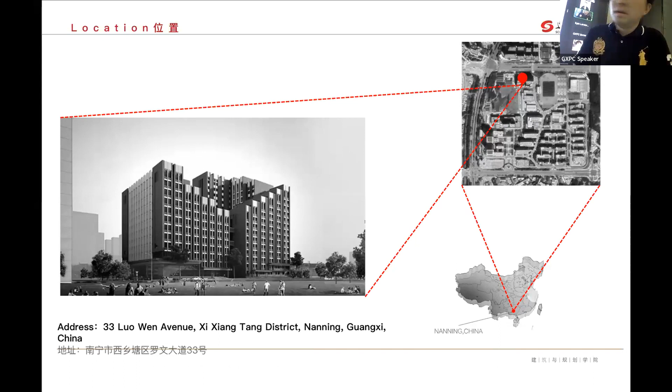So right now, let me introduce our college. This is Guangxi Polytechnic of Construction. Part one is the college introduction. This is our address, in Luo Wen Avenue, Xixiangtang district, Nanning, Guangxi. This is our campus, and everyone can see it.

Picture one is a training building. Number two is a teaching building. Number three is the auditorium. Number four is the gymnasium.

This is our college introduction. We have four major programs: architecture design, landscape design, landscape engineering, and urban planning. This is our teacher team, which is a very high-quality teacher team. This is the professional certification. Number four is our professional future.

We also have the 3D model experience and application center, the BIM technology application center, and the Vision Simulate Teaching Research and Development Center and Project Design Achievement Training Room.

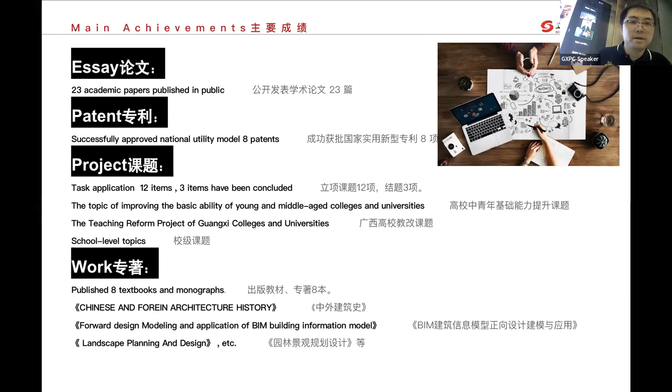Part three is honors and achievement. Everyone can see we have essays, patents, projects and works. This is our main achievement.

Thank you. Thank you, everyone.

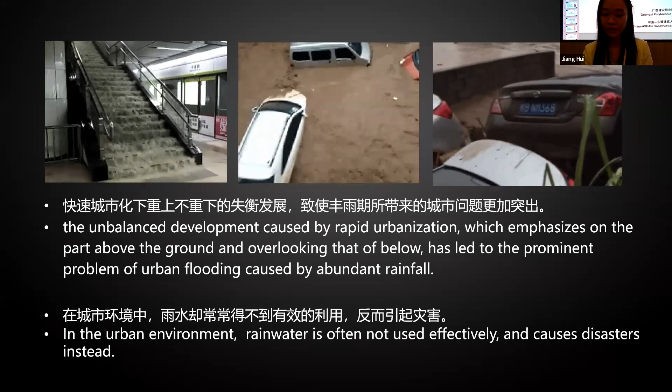However, the unbalanced development caused by rapid urbanization, which emphasizes the part above the ground and overlooks that below, has led to the prominent problem of urban flooding caused by abundant rainfall. Whenever there is heavy or continuous precipitation, the amount of rainfall often exceeds the city's drainage capacity, resulting in waterlogging hazards within the city. In many urban environments today, rainwater is often not used efficiently and causes disasters instead.

In recent years, waterlogging after raining has regularly evolved into a chronic disease in many large and medium cities. In view of the shortage of water resources, runoff pollution and urban floods caused by rainwater, the technology of rainwater collection, treatment, and comprehensive utilization has become an urgent problem to be solved.

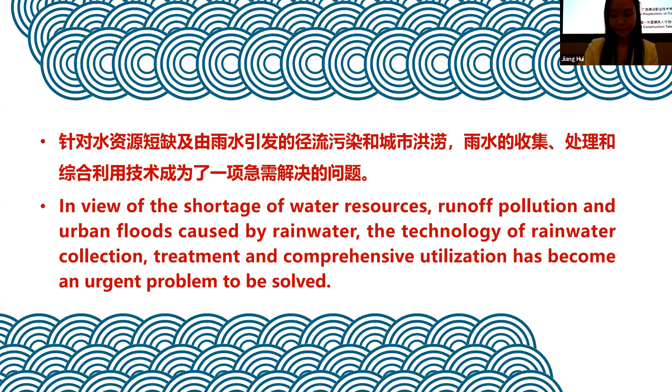Before we analyze rain gardens, let's talk about the following related concepts. The first concept is the sustainable landscape concept.

In contemporary landscape design concepts, there is a growing awareness of building a connection between humans and nature. Sustainable landscapes are places that strike a balance between natural reality and modern technology, promoting and emphasizing place restoration, environmental responsibility, and social development. There is a wide range of sustainable landscape concepts, such as the three 'low' concepts of low input, low impact development, and low maintenance, and the concept of smart city construction.

The second concept is low impact development, which refers to the use of source, decentralized measures to maintain the pre-development hydrological characteristics of the site during development.

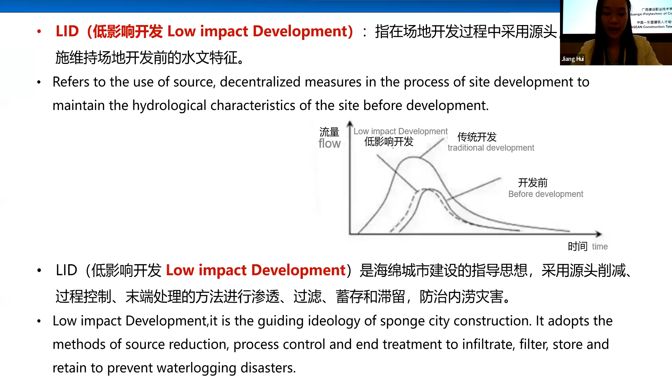The third concept is the sponge city. Sponge city is a new generation of urban stormwater management concept. It means that cities can be like sponges, having good elasticity in terms of adapting to environmental changes and responding to natural disasters caused by rainwater, which can also be called water elastic cities.

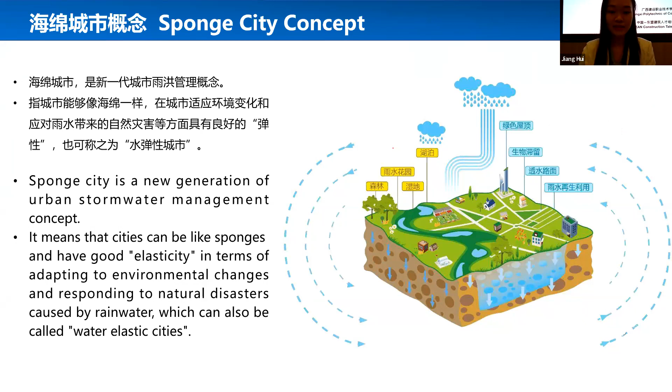The international terminology is low impact development stormwater system construction. When it rains, water is absorbed, stored, infiltrated, and purified, and when needed, the stormwater is released and used.

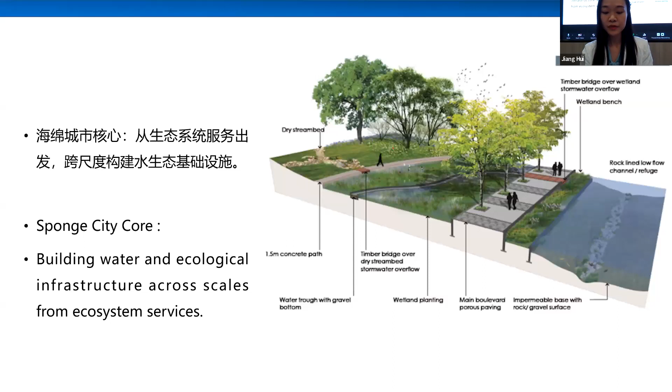The core of sponge city is the construction of water ecological infrastructure, from ecosystem service through cross-scale construction and the combination of multiple types of sponge technologies.

To build a sponge city, we must first reverse the concept. The traditional urban construction model has hardened roads everywhere. Whenever there is heavy rain, the drainage mainly relies on gray facilities, such as pipes and pumping stations.

The main planning and design concepts are rapid removal and centralized control, which often resulted in sudden changes between drought and floods.

Building a sponge city is not about replacing the traditional drainage system with a new one. Rather, it relies on the traditional drainage system and maximizes the role of the city itself.

In the process of sponge city construction, natural precipitation, surface water, and groundwater would be systematically integrated. It would coordinate all aspects of water recycling, such as water supply and drainage, and consider its complexity and long-term nature.

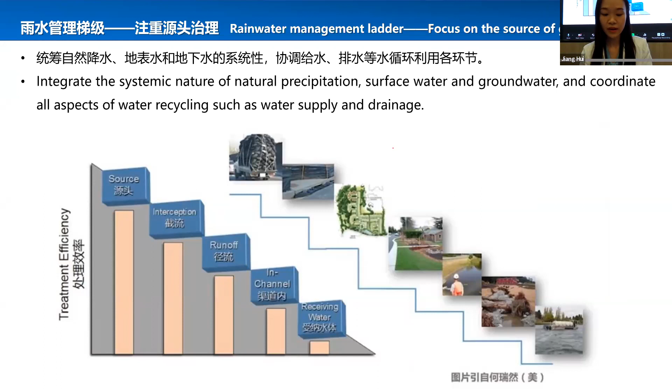The main planning and design concepts are slow drainage and slow release, and source decentralized control, which not only avoid flooding but also efficiently collect water.

Subsequently, this concept quickly attracted more and more people's attention with the development of home garden landscaping. Unlike other environmental factors that challenge us, rain gardens change the way we live, such as lowering our daily cost of living and making us more aware of how we can benefit the environment.

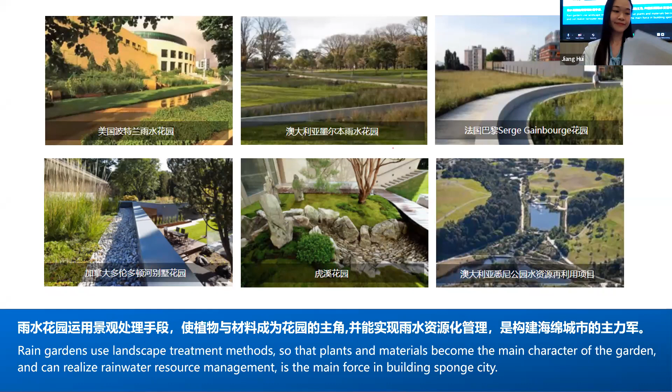Okay, next I'll talk about what a rain garden is.

Rain garden is an important technical measure in the low-impact development system. The principle uses rainwater that is filtered and purified through the interception of plants and infiltration of soil, in order to achieve the effect of reducing the volume of rainwater runoff.

Narrowly defined, rain gardens are only limited in scale and simple structure of shallow concave green space, suitable for neighborhood or private house greening.

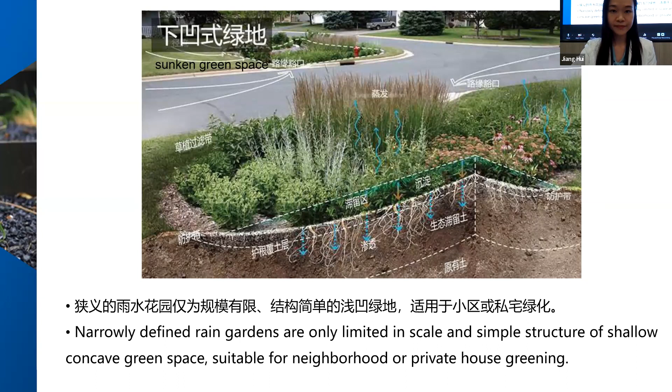It uses biological purification means to stem the runoff while regulating the storm, providing a large amount of irrigation water to the park where it is located.

It provides treated irrigation rainwater to surrounding vegetation such as trees and sports areas, solving the crisis of local drinking and irrigation water. There are various water features and corresponding facilities in the garden.

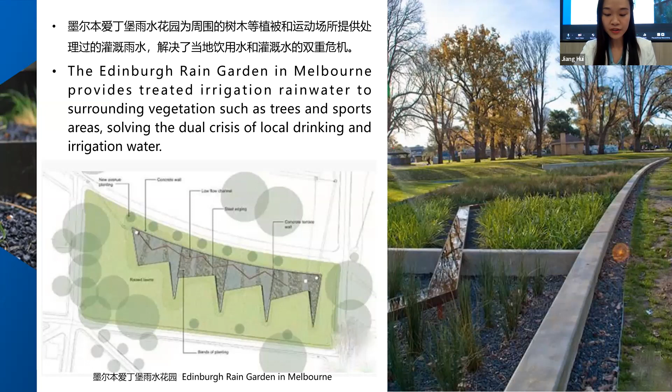These facilities all help to store rainwater, purify water, and divert rainwater to desired areas through diversion pipes. The water, through the roots of various vegetation, is naturally purified.

The concept of rain garden is very broad and encompasses all landscaping that maximizes the capture, conveyance, and conversion of natural precipitation. The entire garden becomes a rain garden. Each element is a component of a rain garden, and a large garden contains smaller rain gardens.

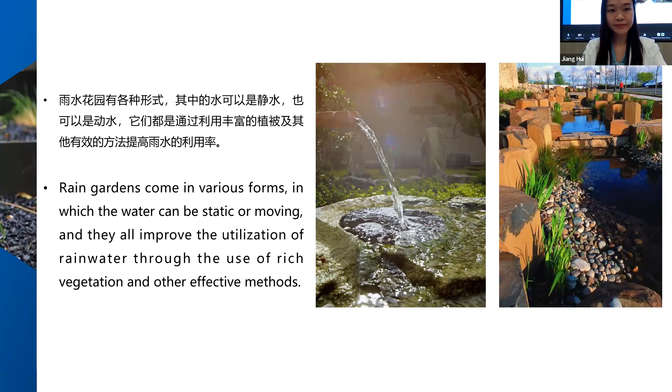Rain gardens have many forms of water features, either still water or moving water. Sponge cities and rain gardens represent a top-down theory promotion and bottom-up design practice.

The second part: let's talk about the classification and functions of rain gardens. I will explain this through 5 parts, including the types of rain garden, construction of rain gardens, how rain gardens work, the function of rain gardens, and the difference between rain gardens and ordinary gardens.

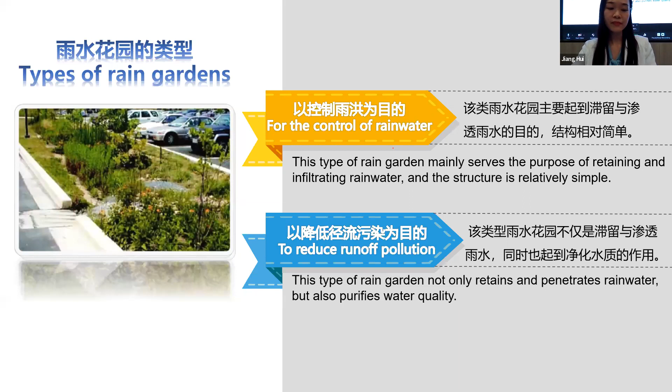The other is a rain garden for the purpose of reducing runoff pollution. This type not only retains and infiltrates water, but also purifies it. It is suitable for geographical areas with relatively serious environmental pollution, such as urban centers and parking lots. The removal of pollutants from stormwater requires careful design of soil proportion, plant selection, and substrate structure.

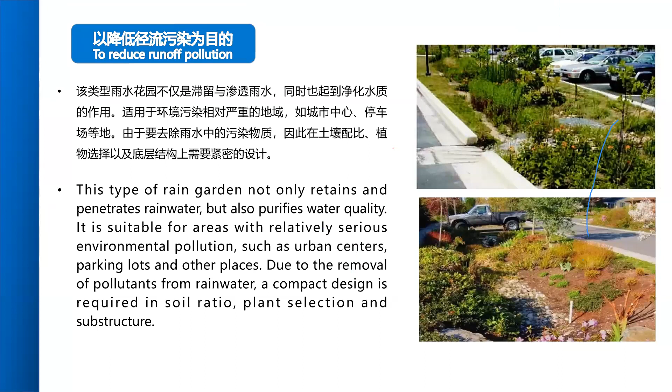Next, let's take a look at the structure of the rain garden. This is the structure. A rain garden is generally constructed from the inside out as a gravel layer, a sand layer, a planting soil layer, a mulch layer, and a water storage layer.

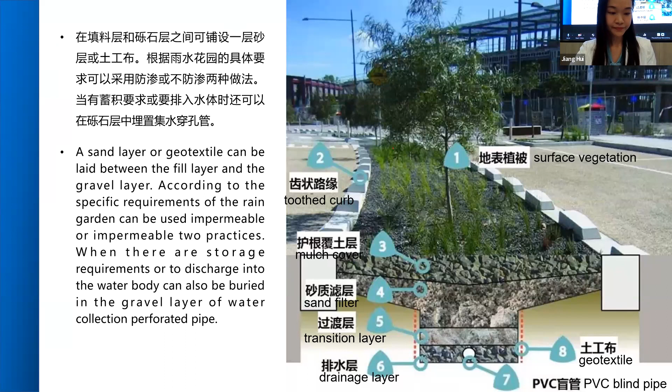At the same time, there are perforated pipes to collect rainwater and overflow pipes to exclude water that exceeds the design capacity. Depending on the specific requirements of the rain garden, both impermeable or non-impermeable practices can be used. So, how does a rain garden work?

In practice, rain gardens take the following forms, including grass swales, sunken green space, and tree pools. Many rain gardens have surface runoff, but they don't function just like a water feature. This is because there is no precipitation in the area for a long time, so the ornamental nature cannot be guaranteed when there is no water flow. Therefore, the design takes into account the landscape in times of drought.

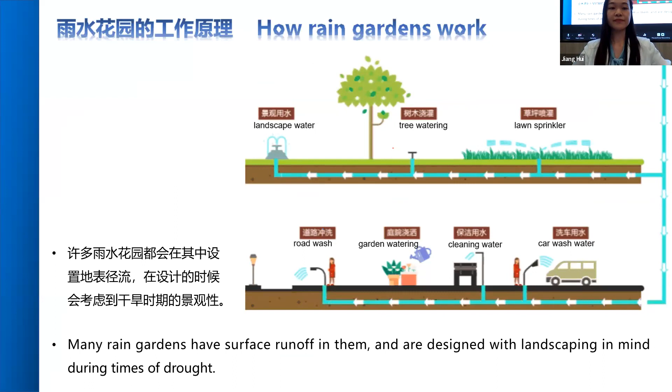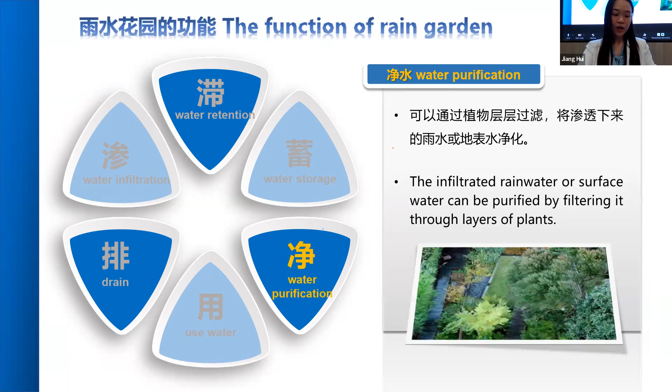Next, let's look at the functions of rain gardens. Rain gardens have the following 6 main functions: water infiltration, water retention, water storage, water purification, water use, and drainage.

Next, I'll talk about the differences between a regular garden and a rain garden. In terms of purpose of construction, a regular garden refers to a place where flowers and trees are planted for play and rest. Rain gardens are naturally occurring or artificially excavated shallow depressions of green space, used to collect and absorb rainwater from roofs or the ground, serving as ecologically sustainable rainwater control and stormwater utilization facilities.

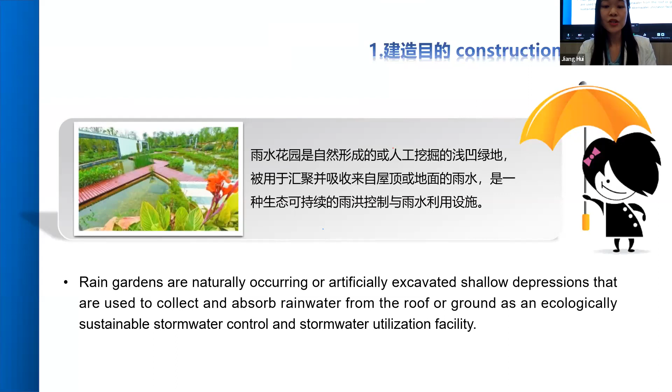In terms of structure, there are also differences between regular gardens and rain gardens. Regular gardens generally have only a planting soil layer and a vegetation layer. In contrast, the construction of a rain garden is more complex, containing 6 structures such as a gravel layer, sand layer, artificial fill layer, planting layer, planting soil layer, and cover layer.

The plant selection for the two is also different. Regular gardens mainly use ornamental plants based on the local climate and the preferences and wishes of the homeowner. Plants for rain gardens need to be selected for their well-developed root systems, strong growth, and resilience.

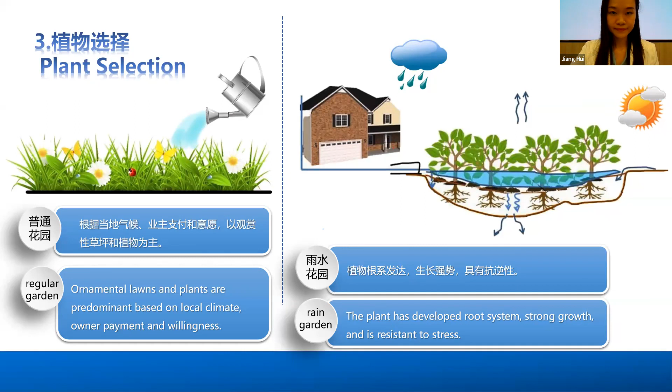Okay, let's begin the third part: rain garden design and construction points. To carry out the design of a rain garden, we mainly need to follow 4 design principles, including the principle of low impact, function first, landscape beauty, and safety. The most important one, I think, is the safety principle.

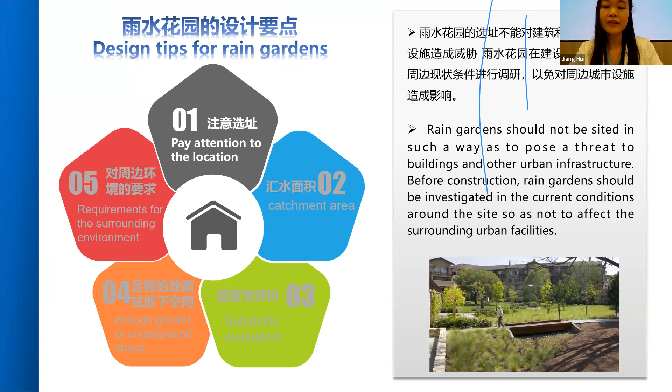Regarding the design points of rain gardens, there are 5 main points to know. The first point is to pay attention to site selection. Before construction, the current conditions around the site should be investigated so as not to affect surrounding urban facilities. For example, in many residential rainwater harvesting systems, the setting of a rain garden requires a minimum distance of 3 meters from the building to avoid soaking the foundation.

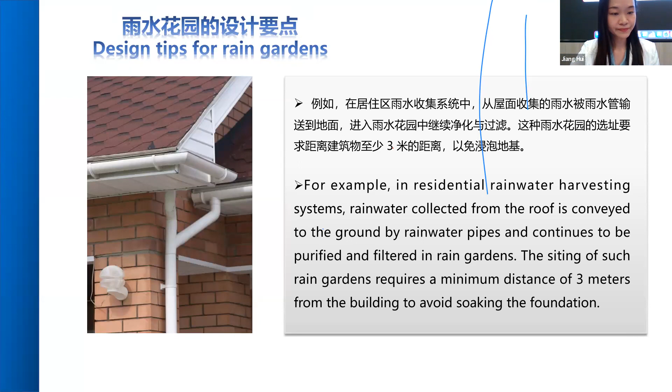The second point requires attention to the catchment area. The site should have a certain catchment area which can collect a sufficient amount of rainwater. For example, urban spaces such as urban roads, urban squares, and low-lying lands can play a role in rainwater control and utilization.

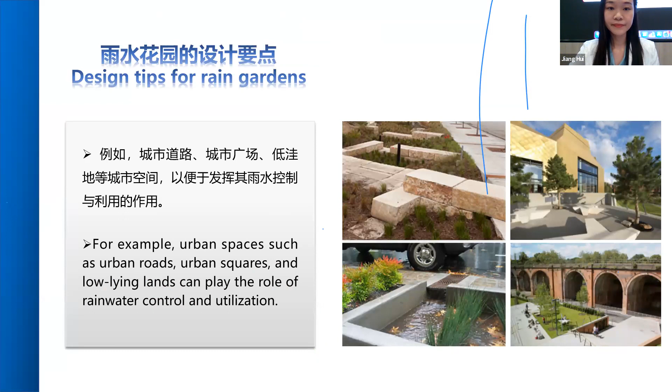The third point is that the design of rain gardens also needs corresponding suitability evaluation. The site must be assessed for suitability before planning. The permeability of soil on the site should be evaluated when setting a site for a rain garden. If the permeability of soil is poor, prolonged waterlogging can occur, which is detrimental to plant growth and at the same time tends to breed mosquitoes and pests, negatively affecting the urban environment.

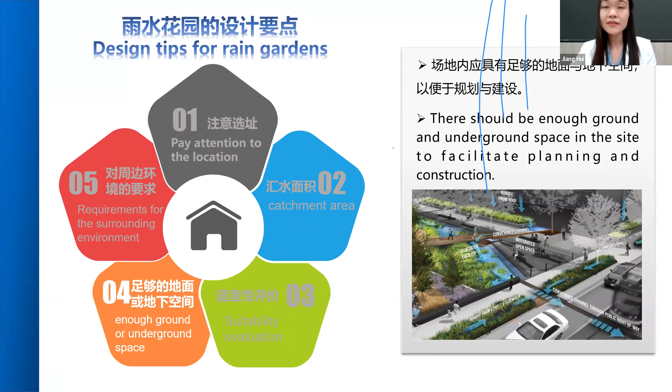The fourth point is that there needs to be enough ground or underground space. The size of the rain garden will be designed based on a water balance analysis within the site. And the fifth point is that the use and maintenance of rain gardens also have certain requirements on the surrounding environment.

As we mentioned earlier, the plant selection for a rain garden is different from that of a regular garden, so special expertise in plant selection for rain gardens needs to be taken into account. Specifically, plant selection for rain gardens requires attention to the following four key points.

First, give preference to native plants. Native plants are well adapted to local climate conditions, soil conditions, and the surrounding environment, and can exhibit good adaptation ability, giving the garden landscape a strong local character.

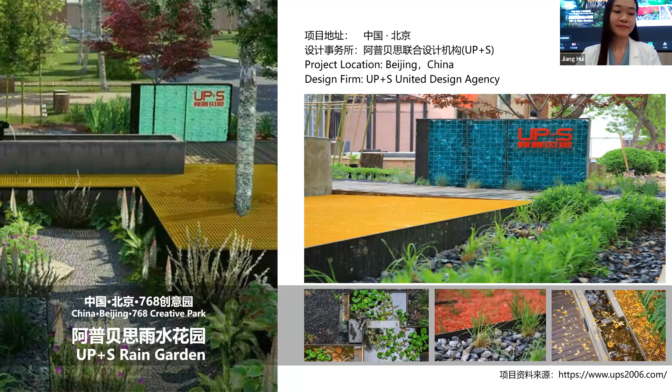The project introduced today is located in the 768 Creative Park. The park was formerly known as Dahua Electronic Industry Factory. It was built in the 1950s, designed by original Soviet designers, and is one of the few surviving old industrial sites. In 2009, it was transformed into a gathering place for cultural and creative enterprises, focusing on knowledge innovation, scientific research and development, and design creativity.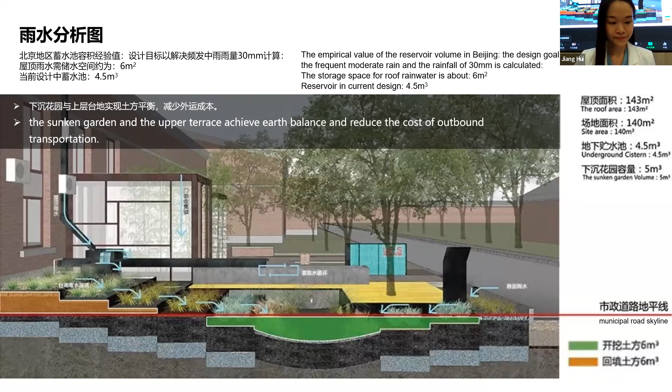The construction of the rain garden was also accomplished through constant interactions between the designer and the builder, as well as several revisions.

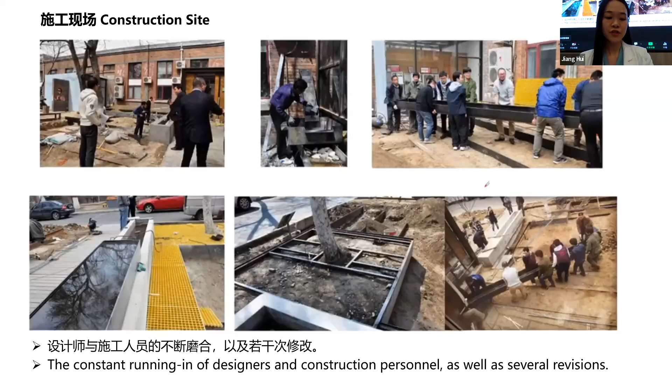The rain garden manages the rainwater on the roof of the building, and the surrounding sites become a true rainwater bank.

This rain garden has 5 distinctive features: rainwater path, terrains, low maintenance plants, engineering efficient materials, and bright colors.

The design focuses on the landscape treatment of the stormwater facilities. For example, the low impact material fair-faced concrete presents a natural and friendly texture.

The use function of the space is also a key consideration. The viewing platform facilities allow close access to and observation of the rain garden, and recycled water features allow rainwater facilities to be approachable and interactive.

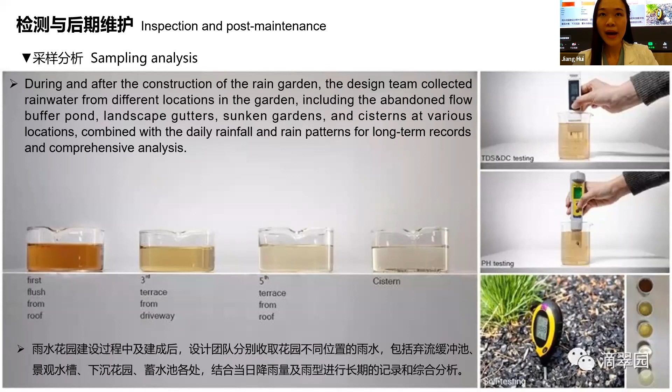Although low maintenance, gardens still require regular maintenance of plants and the rainwater system to ensure that rainwater gardens perform their role of purifying and collecting rainwater.

This is the end of the first. Okay, let's begin the second.

The next project I will introduce to you is Shanghai Houtan Park. The project is located in Expo 2010 Park in Pudong, Shanghai, China. This project was awarded 2010's American Society of Landscape Architects Design Excellence Award.

The design company for this project is Turenscape, a Beijing Turen planning and design company. Turenscape was founded by Dr. and Professor Kongjian Yu in 1998, and the company is certified as a first level design institute by the Chinese government.

The project was built on the brownfield of a former industrial site. Houtan Park is a regenerative living system on Shanghai's Huangpu riverfront. The park's constructed wetlands, ecological flood control, and reclaimed industrial structures and materials, along with urban agriculture, integrate components of an overall restorative design strategy to treat polluted river water and recover the degraded waterfronts in an aesthetically pleasing way.

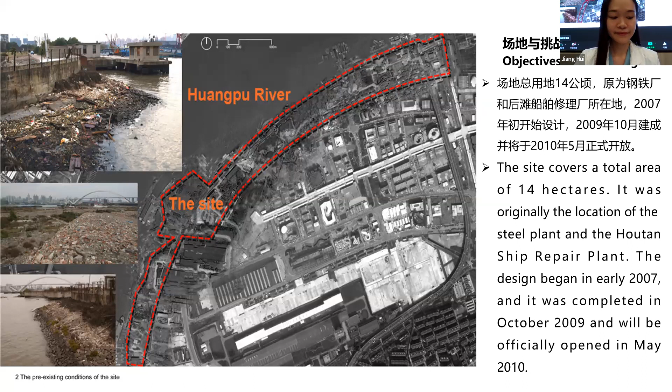The site presents many challenges to the design. Let's see the first challenge: severe soil and water pollution.

The site was originally an industrial brownfield with industrial soil waste and construction waste everywhere, deeply buried. Soil pollutants were serious too. In particular, the water of the Huangpu River was seriously polluted, inferior to Class 5 water. The original abandoned land of the site was invaded by alien species, creating a barren scene.

How to transform the habitats and create a safe and healthy public space is the first challenge facing the design.

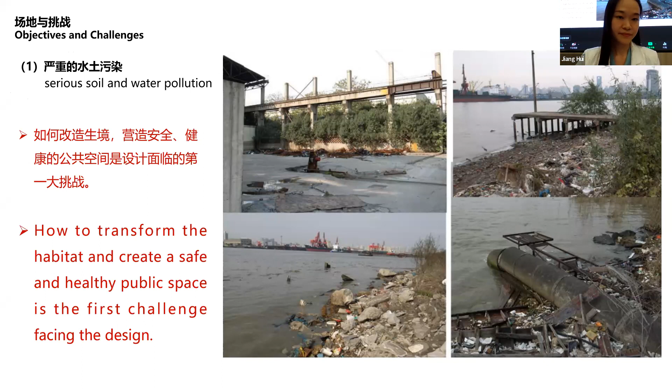The second challenge was to improve flood control. The existing concrete flood wall was designed to protect against a 1,000-year flood event with a top elevation of 6.7 meters, but it is rigid and lifeless. The 2.1 meters daily tidal fluctuation creates a muddy and littered shoreline, currently inaccessible to the public. A conventional retaining wall would continue to limit accessibility and preclude habitat creation along the water's edge, so an alternative flood control design was necessary.

How to meet the flood control requirements and design a waterfront and ecological riverside public space is the second biggest challenge facing the design.

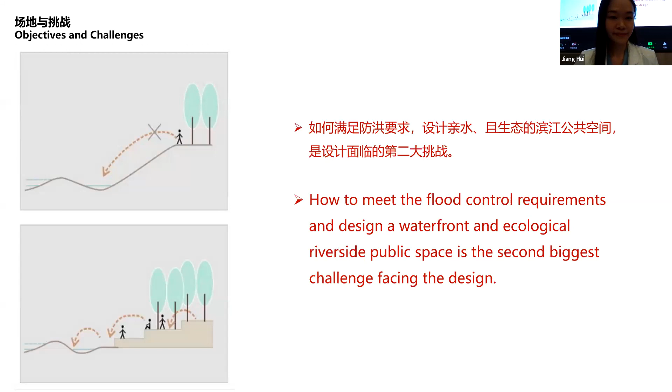The third challenge was the site itself. The area is long and narrow, located between the Huangpu River and the urban expressway, with water frontage over 1.7 kilometers in length but averaging only 30 to 80 meters in width.

Here, let's look at our design strategy. Regenerative design strategies were used to transform the site into a living system that offers comprehensive ecological services, including food production, flood and water treatment, and habitat creation, combined in an educational and aesthetic form. The site is destined to be an innovative demonstration of the ecological culture of the 2010 Expo.

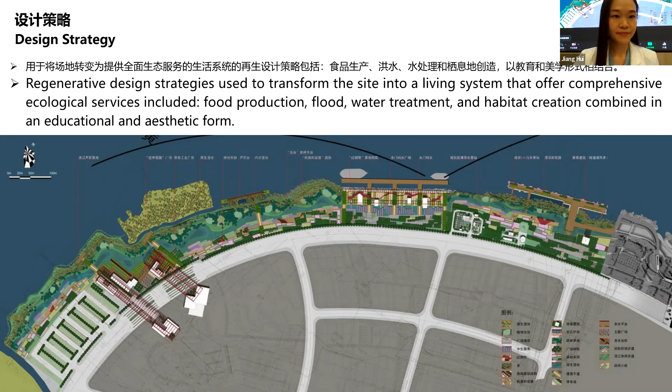Through the center of the park, a layered constructed wetland was designed to treat contaminated water from the Huangpu River. Cascades and terraces were used to oxygenate the nutrient-rich water, remove and retain nutrients, and reduce suspended sediments while creating pleasant water features. Different species of wetland plants were selected to absorb different pollutants from the water.

Field testing indicates that 2,400 cubic meters per day of water can be treated, improving from lower grade 5 to grade 3. The treated water can be used safely throughout the Expo park for non-potable uses and save $500,000 US compared to conventional water treatment.

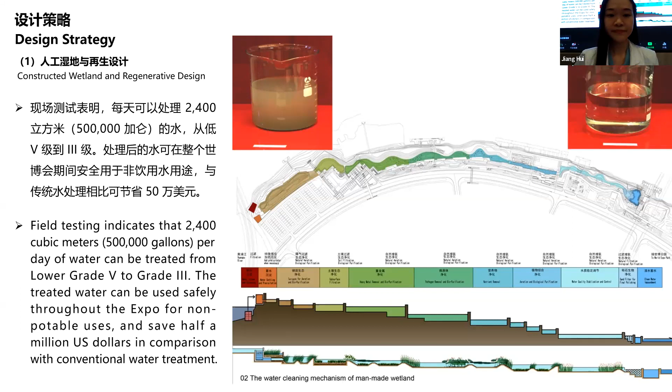And the wetland also acts as a flood protection buffer between the 20 and 1,000 year flood control levee, providing opportunities for recreation, education, and research.

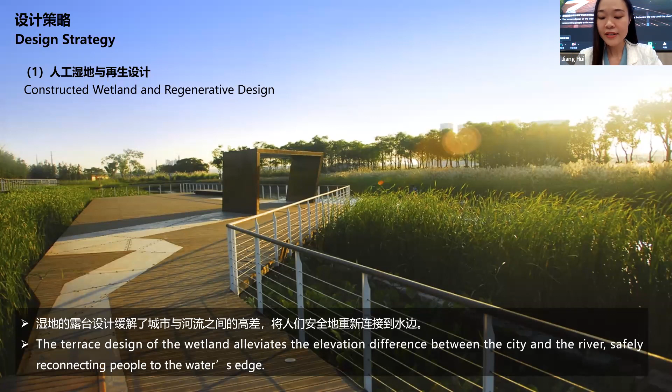The wetlands alleviate the elevation difference between the city and the river. This is the terrace design of the wetland, which elevates and manages the elevation differences between the city and the river safely, reconnecting people to the water's edge.

Additionally, the existing concrete flood wall was replaced by a more habitat-friendly riprap that allows native species to grow along the riverbank while protecting the shorelines from erosion.

And the second design strategy is memory and prophecy. It's memory and prophecy.

Inspired by the fields of Chinese agricultural landscape, terraces were created to break down the 3 to 5 meter elevation change from the water's edge to the road, and to slow the runoff directed to streams in the constructed wetland.

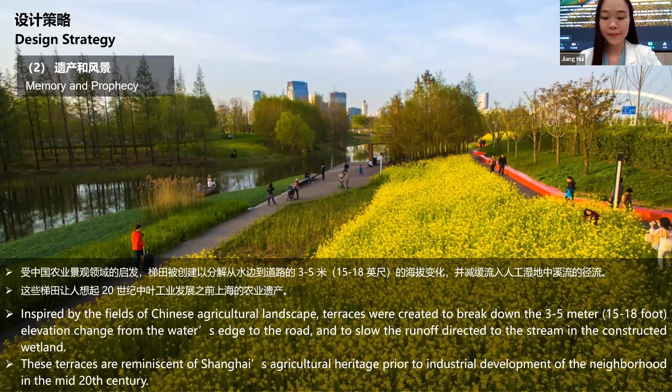Crops and wetland plants were selected to create an urban farm, allowing people to witness seasonal changes. It provides a premier educational opportunity for people to learn about agriculture and farming within the city.

The terraces enrich the landscape along the wetland by creating spaces that encourage visitors to enter the living systems through the field corridors and experience the agricultural landscape and wetlands firsthand.

The industrial spirit of the site is celebrated through the reclamation of industrial structures and materials. Shanghai is the birthplace of China's modern industry, and iconic structures that remain on-site have been transformed into hanging gardens and overlook platforms.

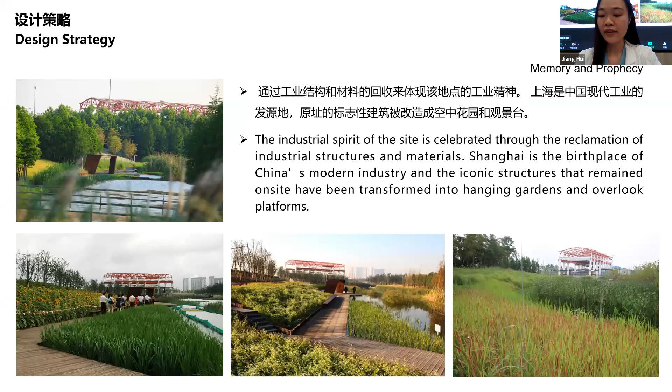An ecologically recovered landscape, urban agriculture, and industrial spirit are the three major layers of the park, woven together through a network of paths where visitors are educated about green infrastructure within a large restored recreational area.

An ecologically recovered landscape: a narrow and long valley space runs through the park, which solves the problem of flood control, opening and closing with lengths of nearly 2 kilometers, during which a series of hydrophilic trails, bridges, platforms, and a network of paths pass through the designed vegetation.

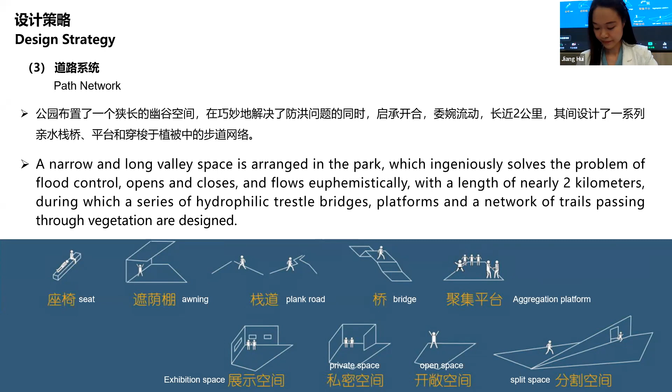The pedestrian network is composed of a main loop, a series of perpendicular roads that bisect the wetlands, and a multitude of footpaths leading through the terraces. This network ensures seamless connections between the park and its surroundings, encouraging access within the site.

Numerous platforms and enclosed containers are designed as nodes on the pedestrian network, including the hanging garden transformed from the factory structure and the landscape dock.

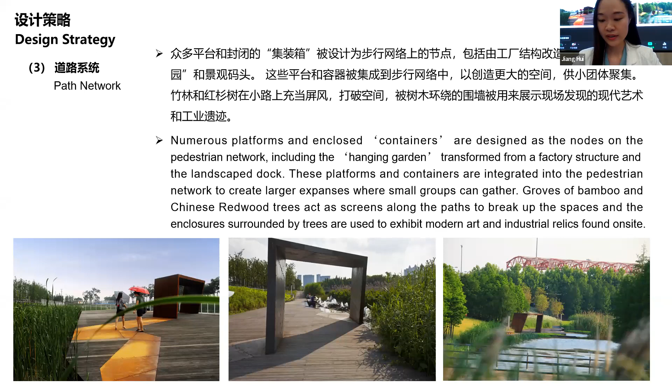Houtan Park demonstrates a living system where ecological infrastructure can provide multiple services for society and nature, with new ecological water treatment and flood control methods. The post-industrial design demonstrates a unique productive landscape evoking the environments of the past, and the future of ecological civilization, playing home to a new aesthetic base of low maintenance, high performance landscapes.

Okay, finally, let's have a video to enjoy the scenery together after the project is completed. Due to network reasons, the video playback may be a little laggy. Please bear with me. Okay, let's see.

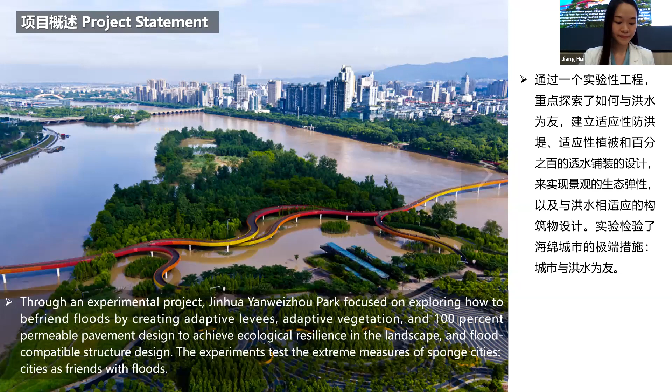Yanweizhou Park is located to the west of Dongxi Street, Jinhua City, where the Yiwu River and Wuyi River meet, in the subtropical region of eastern China. Jinhua suffers from a strong marine monsoon climate with distinct dry and rainy seasons, and the rainy season is often disturbed by floods.

A large number of floodplains have been encircled and developed. The narrowing of the river surface also makes the destructive power of the flood more powerful.

The site conditions posed 4 major challenges to the landscape architects. First, how can the remaining patch of riparian habitats be preserved while providing amenities to residents in the dense urban center? Second, what approach to flood control should be used? Third, how can it be integrated into the surrounding environment to create a cohesive landscape and provide a unique experience for visitors? Finally, most importantly, how can separate city districts be connected to the natural riparian landscape to strengthen community and cultural identity in the city of Jinhua?

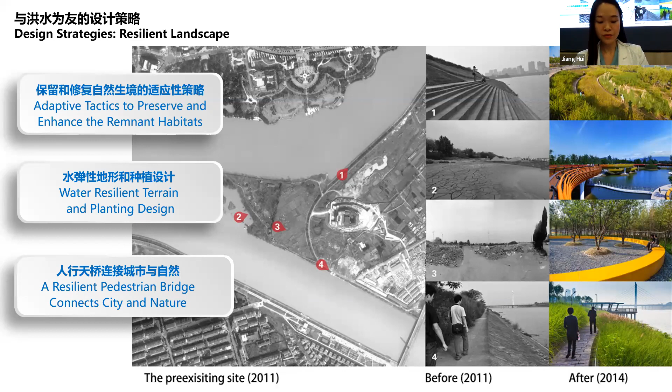The design strategy for this project is to befriend the flood, with 3 main strategies proposed. The first, an adaptive strategy, was to make full use of the existing riparian sand quarries with minimal intervention. This is why the existing microterrain and natural vegetation are preserved, allowing diverse habitats to evolve through time. The biodiversity of the area was enhanced through the addition of native wetland species.

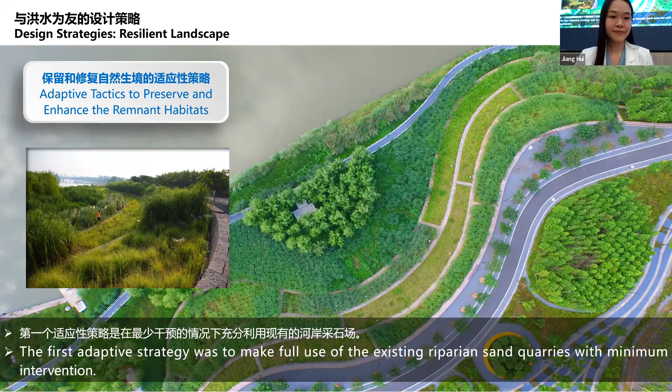The second strategy is water resilience terrain planting design. Due to the monsoon climate, Jinhua suffers from annual flooding. For a long time, the strategy to control flood was to build stronger and taller concrete flood walls along the riverbank. This severed the intimate relationship between the city, the vegetation, and the water, while ultimately exacerbating the destructive force of the annual flood.

The local water conservation department had built 2 flood control dikes, with 20-year occurrence and 50-year occurrence standards, in some sections of Yanweizhou respectively.

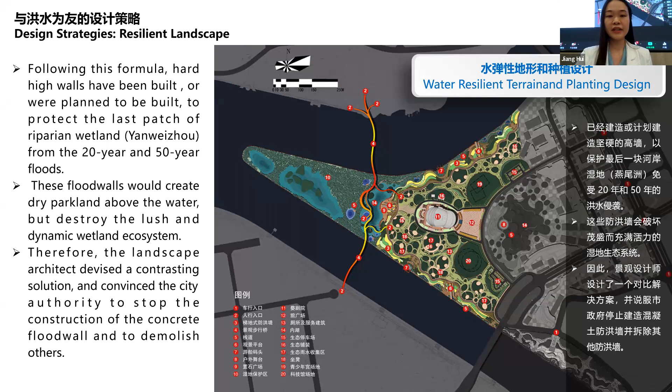This flood wall would create dry parkland above the water, but destroy the lush and dynamic wetland ecosystem. Therefore, the landscape architects devised a contrasting solution and convinced the city authority to stop construction of the concrete flood wall and demolish others.

Instead, the Yanweizhou project makes friends with flooding by using a cut-and-fill strategy to balance earthwork and create water-resilient terraces along the river embankments, covered with flood-adapted native vegetation.

This measure not only increased the flood section of the river, but also slowed down the speed of the water flow. It also relieved the pressure of flood control on the city side of the opposite bank, and improved the hydrophilicity of the park's adjacent water interface.

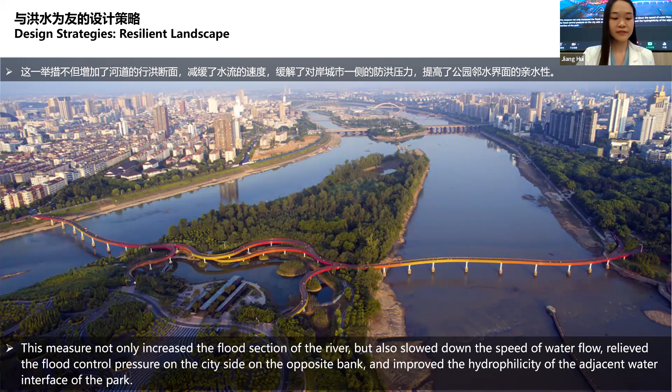The flood-deposited fertile silts on the terraces enrich growing conditions for tall grasses native to the riparian habitats. Therefore, no irrigation or fertilization is required at any time of the year. The terrace embankments will also treat and filtrate stormwater from the pavement above.

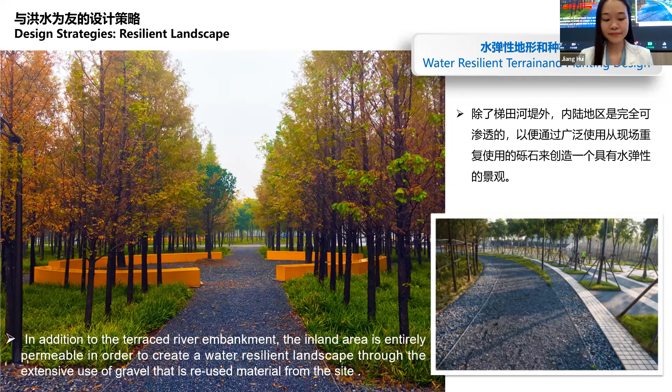In addition to the terrace river embankments, the inland area is entirely permeable in order to create a water-resilient landscape through the extensive use of gravel, that is reused material from the site. The gravel is used for a pedestrian area, and the circular bioswales are integrated with tree planters. Permeable concrete pavement is used for vehicular access routes and parking lots.

The third strategy is resilience pedestrian bridge connecting city and nature. A pedestrian bridge spans across the two rivers, linking the parks along the riverbank in both the southern and northern city districts, connecting the city with the newly constructed Yanweizhou Park within the river.

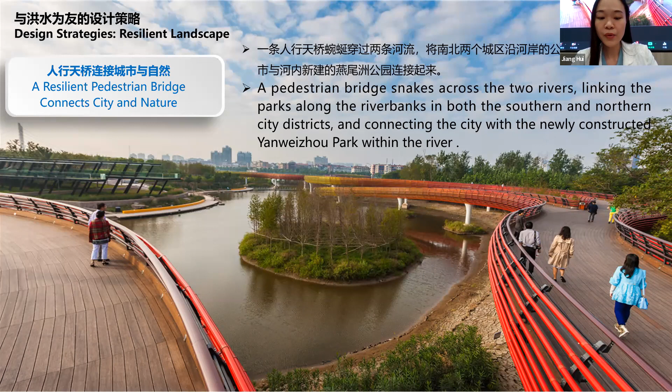Look, this is the bridge. The bridge design was inspired by the local tradition of dragon dancing during the spring festival. Like the bench dragon in the annual celebration, the bench dragon bridge symbolizes not only a form of celebration practice in Jinhua area, but it is a bond that stresses the culture and social identity unique to these areas.

As water resilient infrastructure, the new bridge is elevated above the 200-year flood level, while the ramps connecting the riparian wetland park can be submerged during the 20-year and larger floods. Flood water covers the park for a very short period of time. The bridge also hovers above the preserved patch of the riparian wetlands and allows visitors intimate connection to the nature within the city.

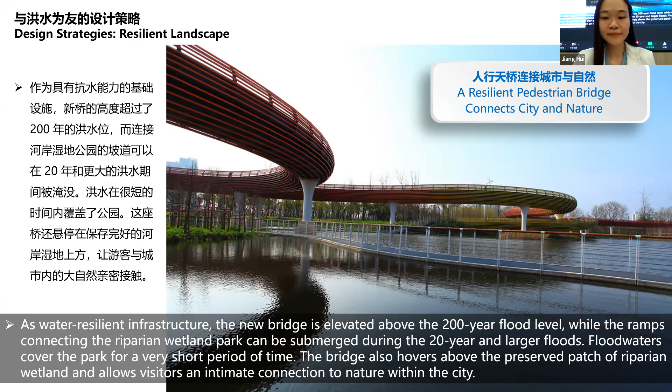The landscape architect designed the bridge to reinforce the festive vernacular tradition, but also as art, with a bold and colorful combination of bright red and yellow tones. They are strengthened by the night lighting. You can see these pictures - it is the night lighting scene.

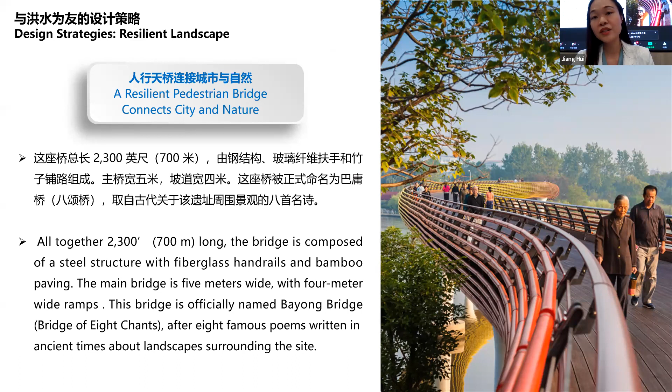The bridge is composed of steel structure with fiberglass handrails and bamboo paving, altogether 700 meters long. It is truly a resilient bridge that is adaptive to river currents and the flow of people, while binding city and nature, future and past.

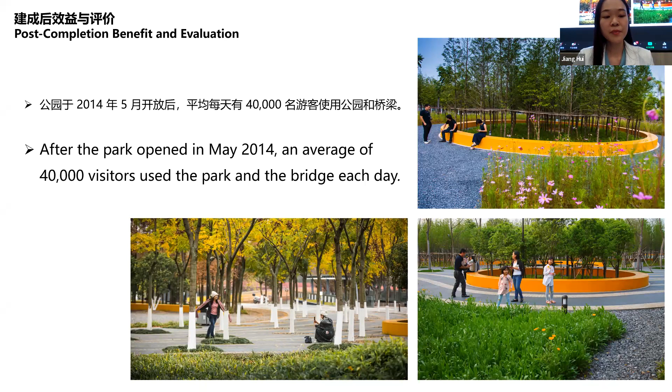The project proved a success after the park opened in May 2014. An average of 40,000 visitors use the park and the bridge every day. The local media claimed the whole city is crazy about one single bridge, and now Yanweizhou Park has created a new identity for the city of Jinhua.

This project explored the design approach of elastic landscape and realized the ecological elastic function of landscape through the design of ecological flood control embankments that is friendly to floods, design of vegetation suitable for drought and flood, and the design of permeable pavement.

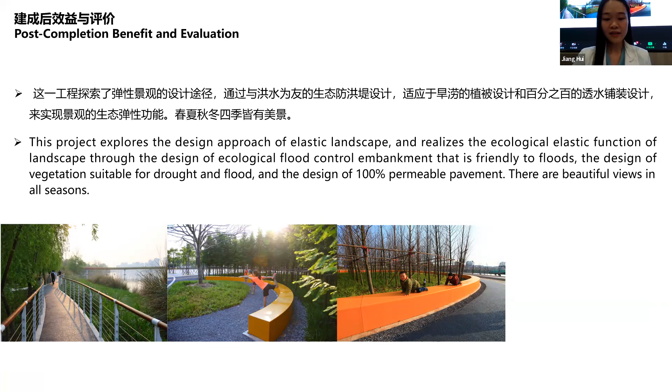Now, next, let's enjoy the scenery of Jinhua Yanweizhou Park video.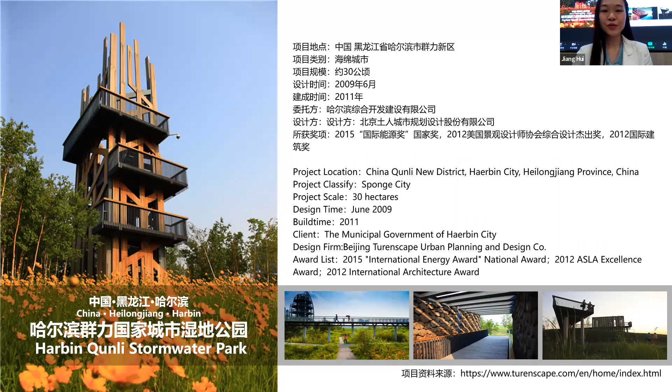This is an experiment for the construction of the sponge city center, and its exact approach uses the mulberry fish ponds technology from Chinese agricultural tradition, in the low-lying area of the city, simple filling and excavation to create a green sponge city center.

The result shows that with 10% of urban land, the problem of urban waterlogging can be solved. At the same time, comprehensive ecosystem services can be achieved, including providing native habitats, urban recreation, and improving the quality and value of the city.

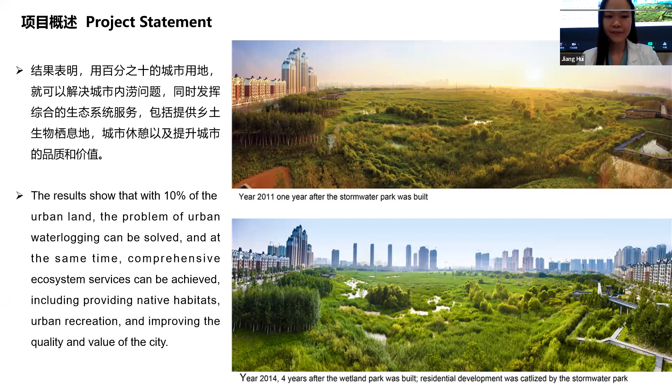Beginning in 2006, a new urban district, Qunli New Town, was planned to be developed at the east outskirts of Harbin City in North China. 32 million square meters of building was to be constructed in 30 to 50 years. More than a third of a million population are expected to live here.

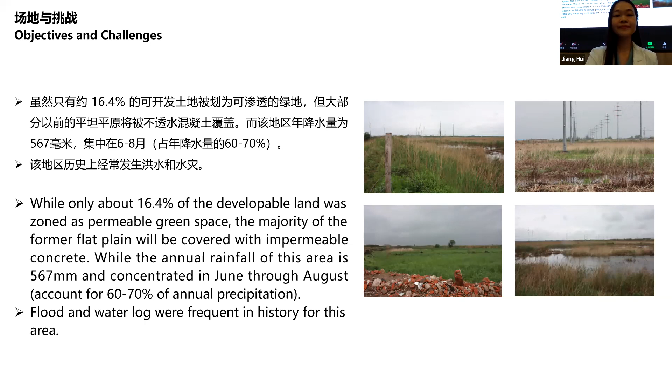But flood and waterlogging are frequent in history for this area. Turenscape was commissioned to design a park of 34.2 hectares of former wetland, surrounded on four sides by roads and dense development. Water sources for this former wetland had been cut off, and the wetland was under threat of disappearing.

Turenscape's strategy is to transform the dying wetland into an urban stormwater park, which will provide multiple ecosystem services for the new community, and the result is a great success.

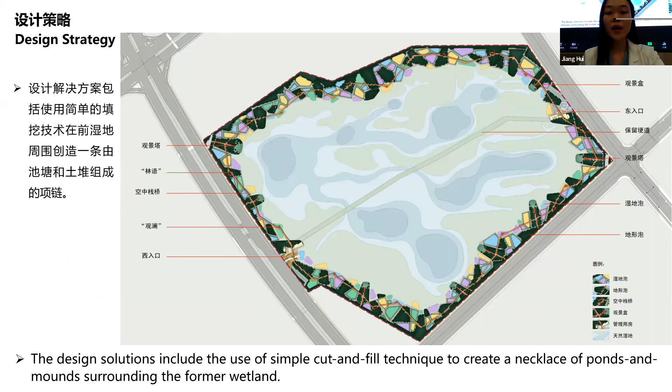The design solution includes the use of simple cut and fill technique to create a necklace of ponds and mounds surrounding the former wetland. The design preserves the main core of the wetland, leaving it intact for its natural evolution and transformation. At the same time, a buffer zone for stormwater filtration and purification is created around the core of the wetland.

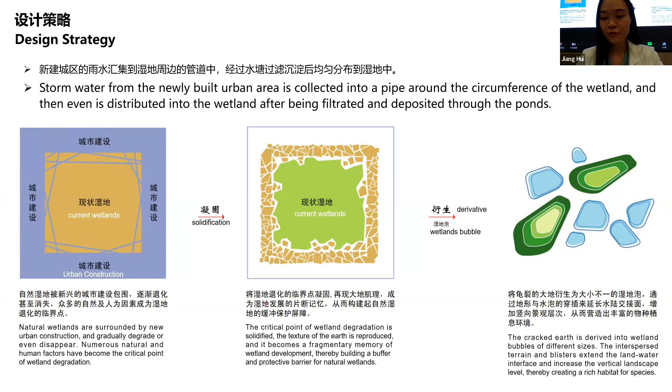Stormwater from the newly built urban area is collected into the pipe around the circumference of the wetland, and then evenly distributed into the wetland after being filtered and deposited through the ponds. Native wetland grass and meadows grow in ponds of various depths, and the natural evolution process is initiated.

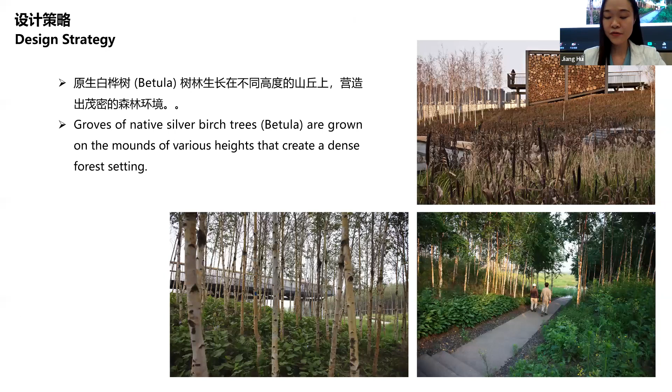Native silver birch trees are grown on mounds of various heights that create a dense forest setting. A network of paths is built into the pond-and-mound ring, allowing visitors to walk through a forest experience. Platforms and viewing towers are set in the ponds and on the mounds to allow visitors to have an intimate touch of nature and distant views.

A skywalk linking the mounds allows surrounding residents to have an above-the-wetlands canopy experience.

Through the transformation of the dying wetland, stormwater and frequent flooding in the city have become the basis for a positive environmental initiative for the city. The stormwater park has now been listed as a National Urban Wetland Park. This project demonstrates an ecosystem-service-oriented approach to urban park design, showcasing a water urbanist approach.

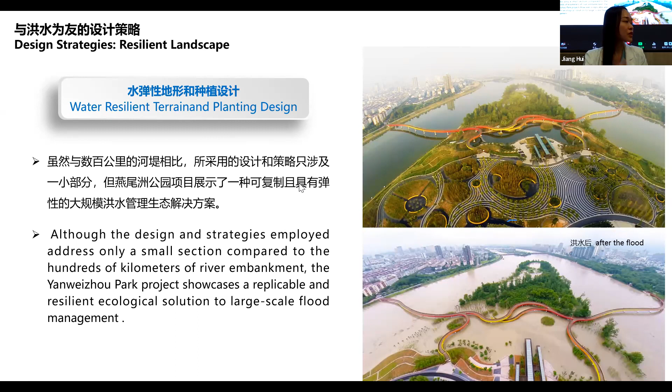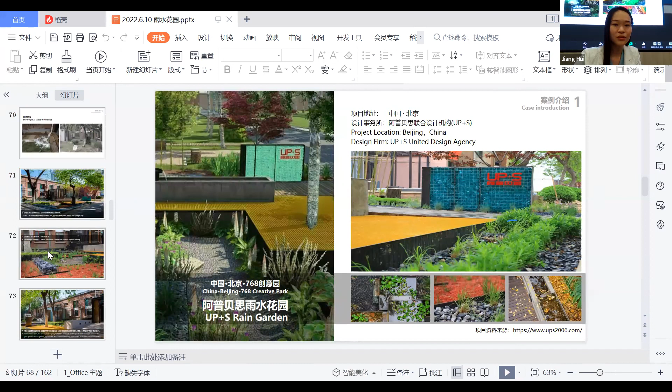We are answering the question about whether there is a disadvantage of the rain garden. Yes, there is a disadvantage: if you want to rebuild this area, the cost may be a little bit high. The disadvantage is mainly about cost.